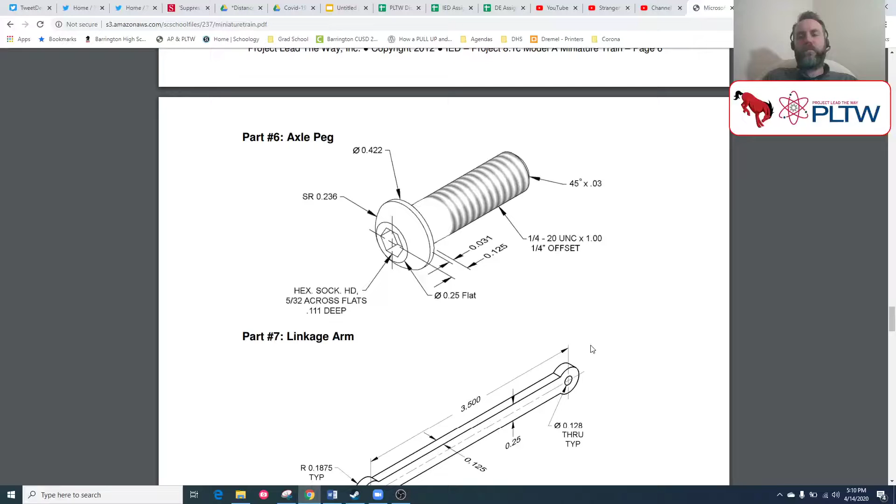All right, next part. We've gone through, we've made the wheel, we've made everything up to that. We've got 5 parts made, hopefully. Next one is axle peg.

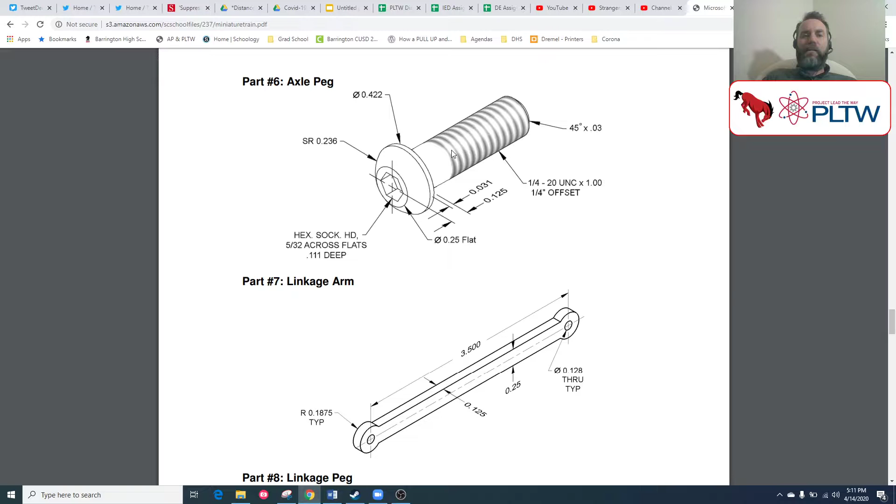I'm going to skip that one for a couple of reasons. There's some easier ways to get this. OnShape doesn't do the threads real well, so I'm going to clear it with Parmar. I've got a couple of different ways to get this one done, so I'm just going to hold off. That one's going to be the last one.

I believe you guys can draw the linkage arm. That is one extrusion, you can get that done. I believe you can get the linkage peg if you watched a little bit about the hitch peg. You should be able to get that one done.

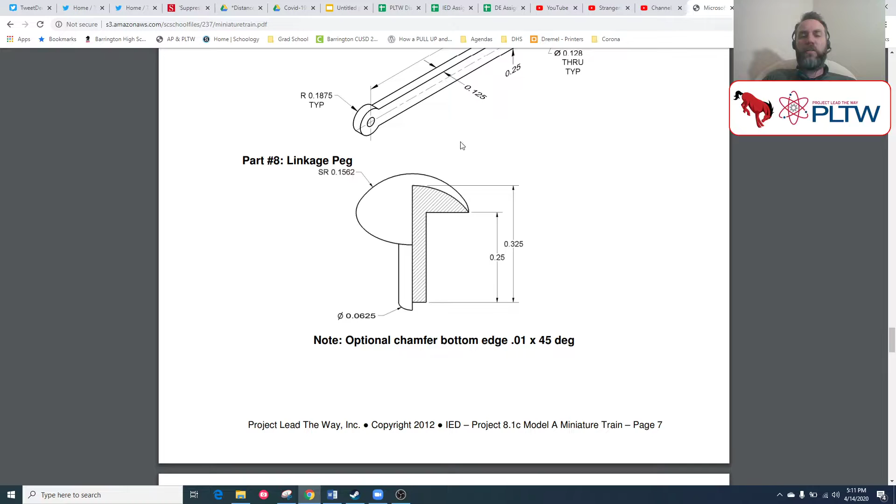Spherical radius 0.1562. Everything else is listed there. But the CowCatcher here, we got some things to decipher. So let's get to deciphering.

There's my wheel almost done. Let's add a new part studio, and I'm going to immediately rename that. We're going to rename that CY underscore CowCatcher.

And I'm going to start a sketch. Well, let's go look at the drawing here. So where to start, where to start, where to start? Well, if I look at it, I've got these angled faces, and there's no real angle called out anywhere. There's no way that I'm going to be able to make that cut, and honestly, it's a compound cut.

So what I need to do is find the bottom edge, that 5-sided, I guess not trapezoid, that kind of squished house thing - so it's an irregular pentagon on the bottom edge, and the same thing for the top edge, and then we'll do a loft between the two.

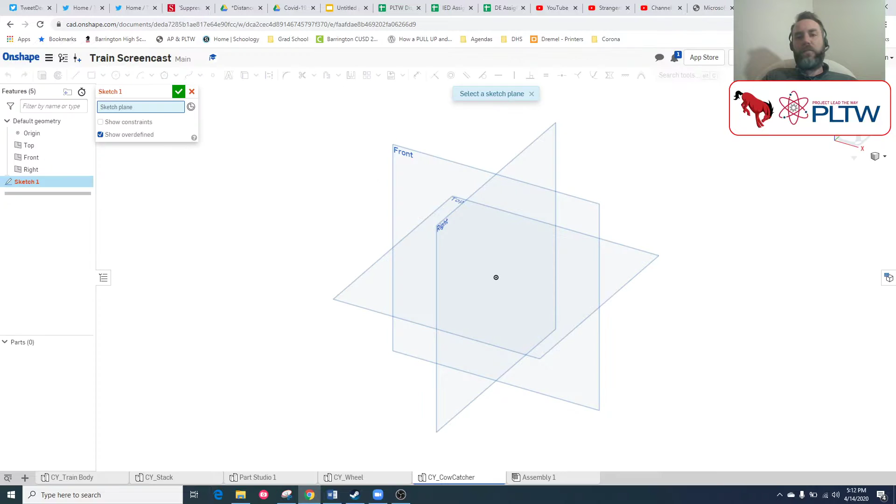So you should have done some lofts in Inventor. So let's start on this top plane. Let me move my view cube down here. Navigate to the top plane, and I'm going to draw out a line.

Usually I try to grab onto that point first, but I want to make sure that I have that other plane going right down the center line. So I'm going to do some things here, just drawing out my general shape. Here's one of the key things.

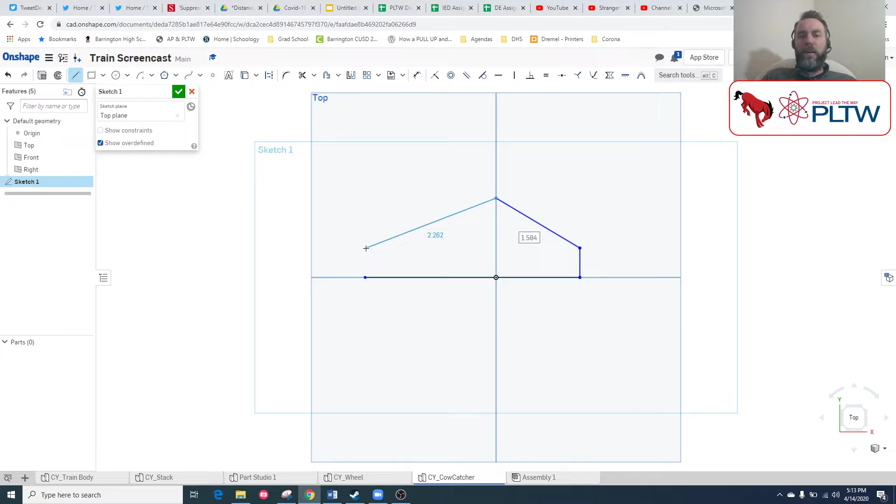I want to see that center point highlight orange when I put in the point here. I want to line that up directly. And this isn't going to end up being vertical yet, so we'll throw that in there. Make that vertical. While we're at it, let's make these two sides equal.

Listen to my son cry in the background and tell him that it's not so bad.

If we make these two equal, suddenly we've got it so that it's symmetric, and I don't even need to dimension it to be right down the center. It's just going to be there by default.

So I look at my overall width. I've got 1.8. My overall depth is 1 inch, and I think that's pretty much - I've got this 1/4 inch dimension as well on the side. So let's throw in some dimensions, and I've got 1 inch, or wait, no, 1.8.

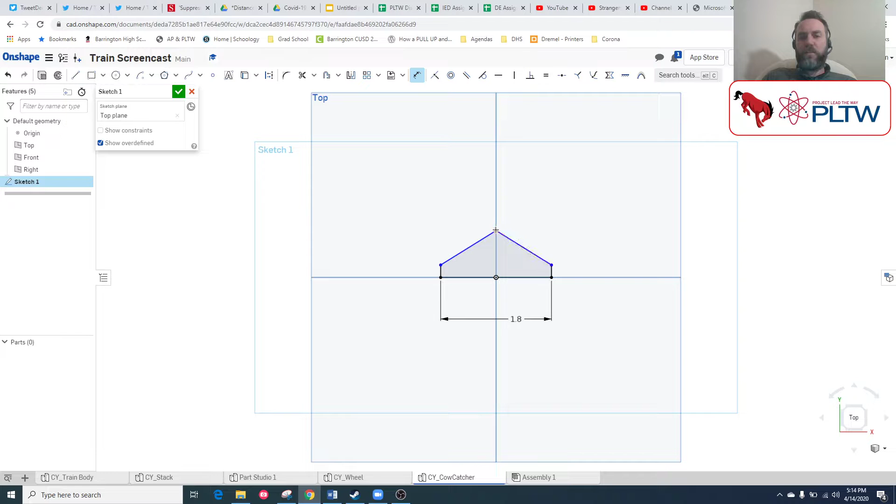Hard to concentrate in here with all the wailing.

And 1, and 0.25, and the whole thing turned black, so that's good.

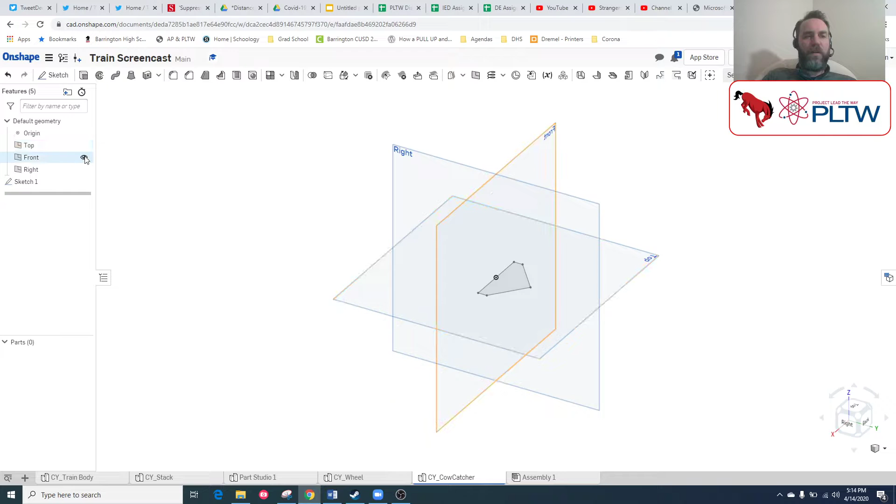We will just leave that sketch alone for right now. Now we got to go and create a new plane, and let's just turn off the other ones for a second. Let's make them go away for the moment.

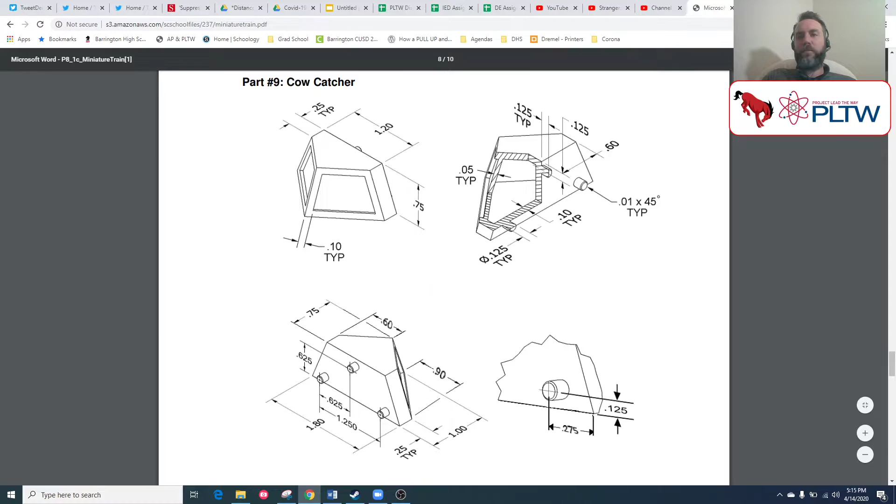And we will make another plane. Right there is our new plane, and we are going to offset that from the top plane - 0.75? 0.75 is the height. Our width is 1.2, and our distance, we'll call it depth, out to this point on the top is 0.75. So I want to make sure that I am drawing, make that plane.

So on plane 1, I am looking straight down on it. I want to reference that origin point. So let's do a sketch on plane 1.

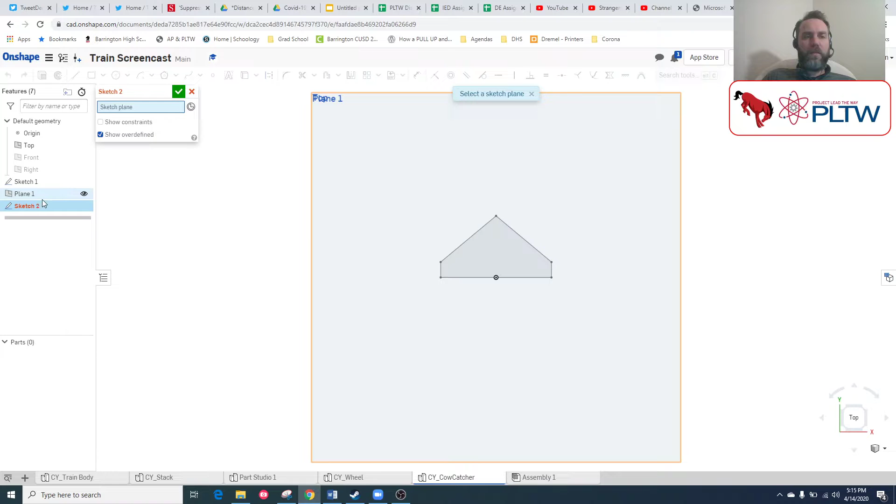We're on plane 1. Select plane 1 over there. Got it. All right, and I'm going to draw my line.

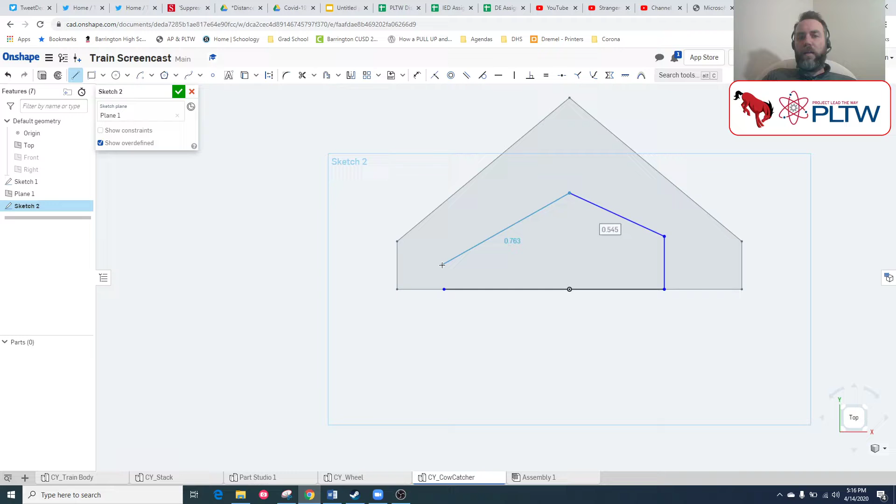Zoom in here a little bit, making sure that I'm going to be horizontal with that center point. Don't care that I'm not perfectly aligned there. Now I want to make sure that this midpoint is directly above there, and it goes in vertically. That's not vertical yet, so I'll make that vertical.

We're going to type E for equals. We'll make both sides equal. We will make these two equal, and when we do so, it centers itself.

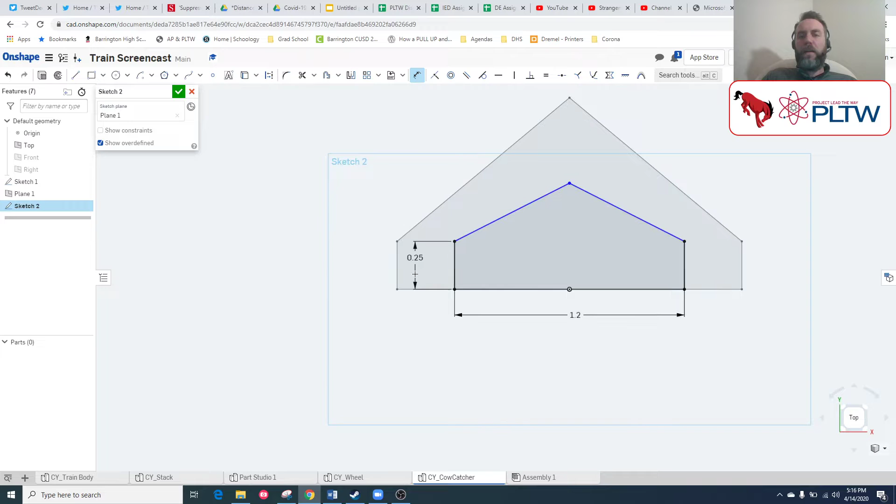Now we need to throw some dimensions on there. The key dimensions were from here to here, being 1.2. We were pretty close, each side maintaining and being 0.25. And then from the top point to this base here, I believe that was 0.75.

And there you go. So now, if I finish my sketch, I can loft between the two of them.

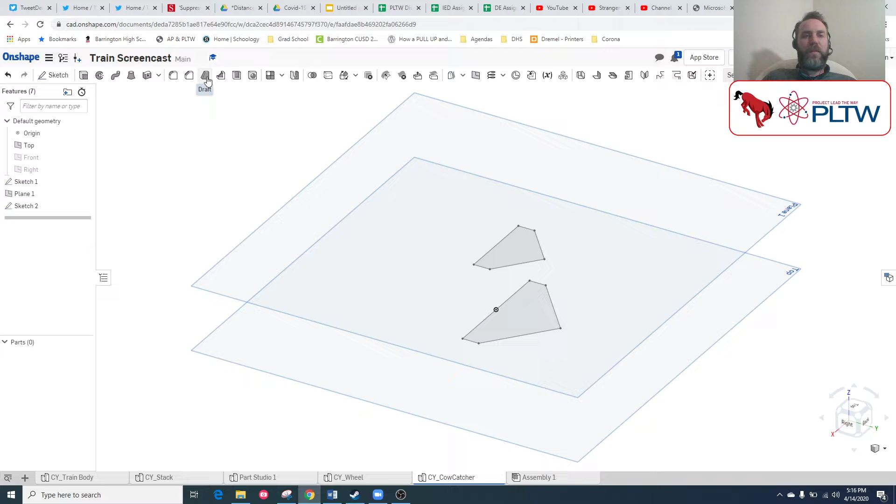That's a draft. There's loft. So it's select sketch 1, select sketch 2. We want to add - I guess we can't add. We want to make a new solid here to start.

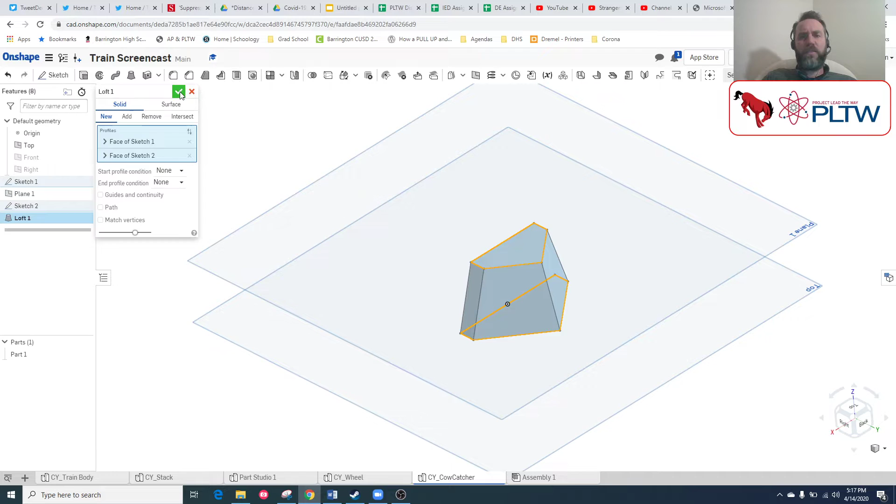And it looks like that is right. It looks a little steep. Did I make that too high on the last, or the offset too high? I think I did. Go to plane, edit my plane. Offset distance was 1 inch. I'm going to bump that down to 0.75.

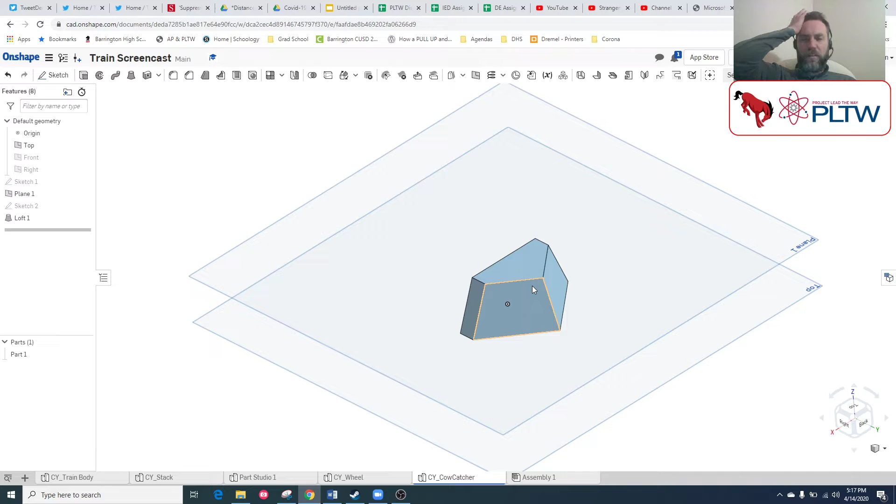Say check, and that looks more correct. So you see, just like Inventor, we're able to go back and adjust many things.

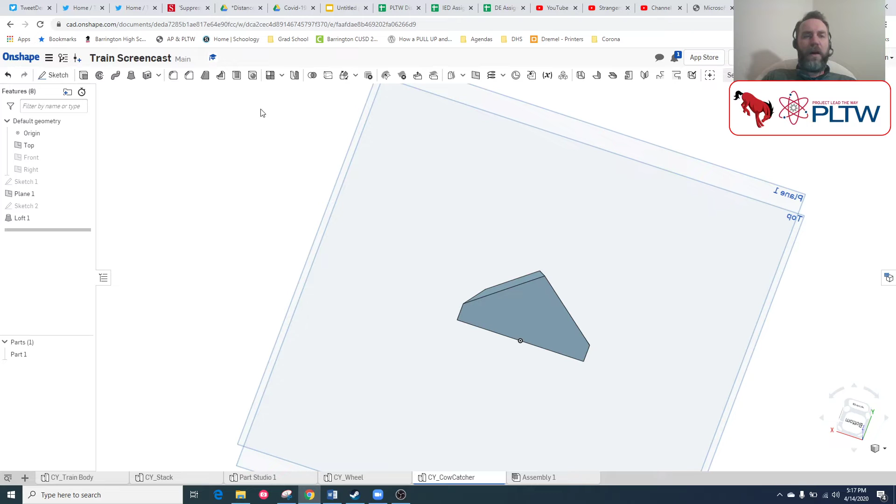Next thing we have is this shell on the bottom, and I think we've all used the shell feature in Inventor. Here we're calling out that the shell thickness, that wall thickness, is 0.10. So if I navigate to the bottom and say shell, there's my shell command. Select that bottom face, tell it to be 0.1 inches, and there you go, you've got that feature built right in already.

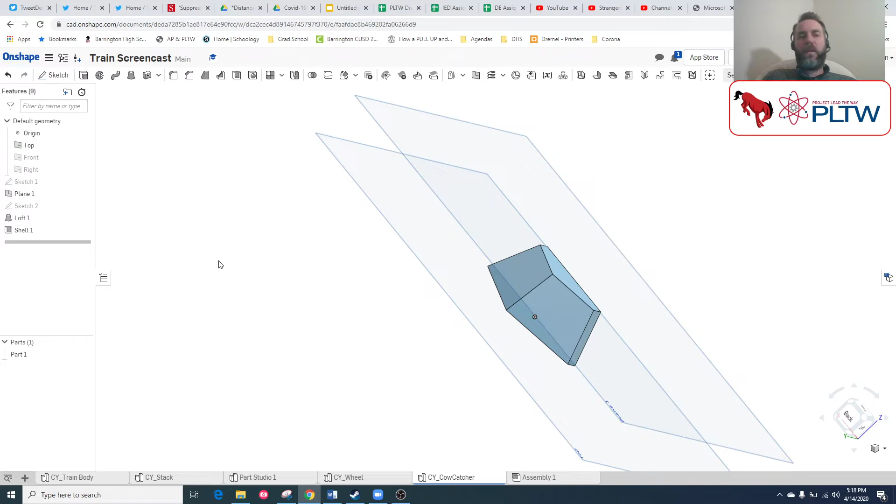Next step, I'm going to turn off that plane, turn off the top. I've got no planes on this thing now, and I'm going to put one that goes right back down the middle, just for giggles right now, because I'm going to use it.

I needed to focus on these little window insets, which say they are 0.1 off the edge, and it's typical - so 0.1 off of each edge.

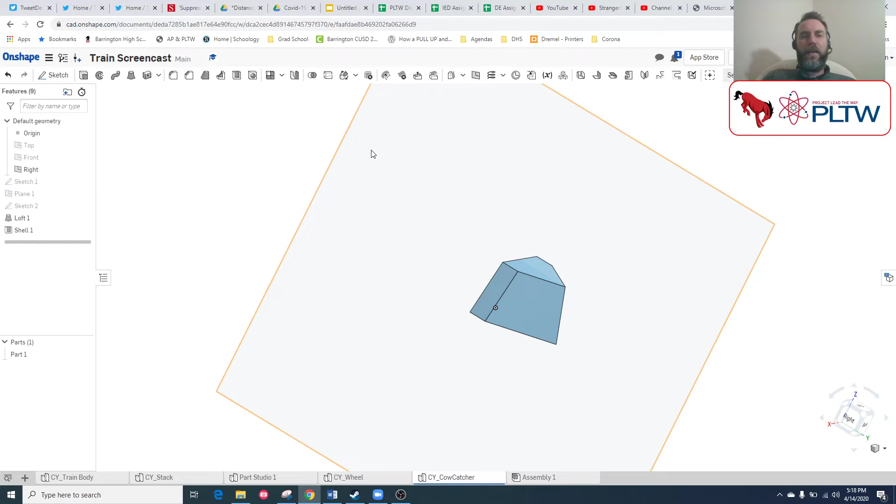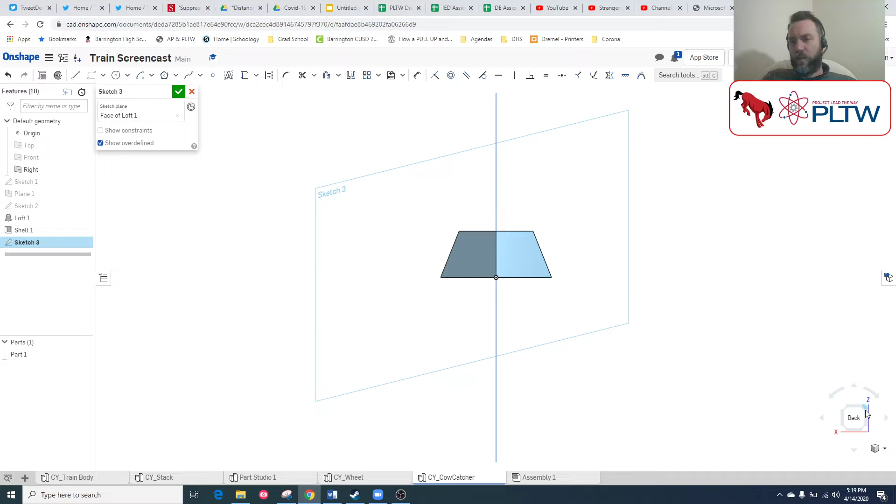So if I were to sketch and select this face right here, you see that I now have this plane that is akimbo. If I'm looking at it from the front, you see this weird sketch plane. If I look at it there, I've got this weird sketch plane.

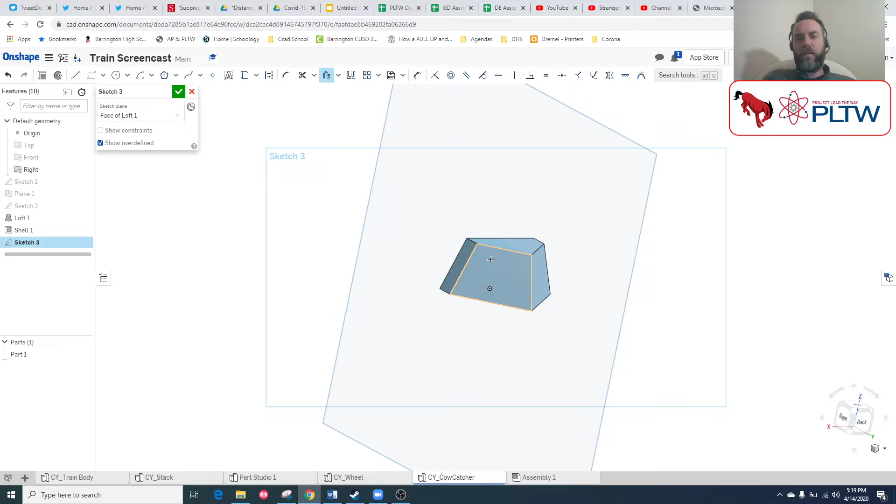So I'm going to right click on that sketch and view normal to sketch plane, so I'm staring straight at it, and I want to just offset the edges. I think I can do that by selecting offset - I don't even need to, just select the whole face, and you see it's offsetting in the wrong direction. I think I can click that arrow, offsets it in the other direction, hit enter, it placed it, and I want 0.1, and it now dimensioned that whole thing.

There you go. I need to extrude that section back and cut away. We see the wall thickness is only 0.05 here - it's not all the way through, it's just going back a little bit less or more, depending on your view.

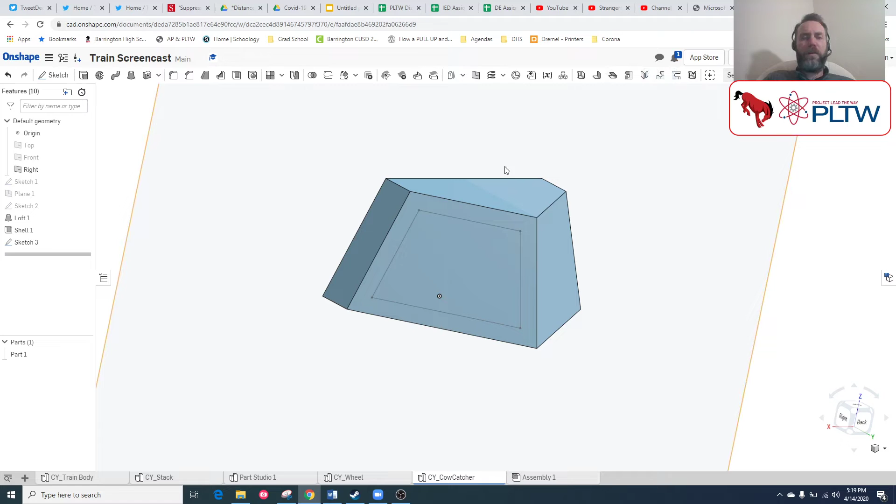So I'm going to hit Shift E for extrude. I'm going to select that face, take a look at it. I want to do 0.05, want to make sure it's going the other direction, and make sure it's removing that. And there you go, so it's performing a cut.

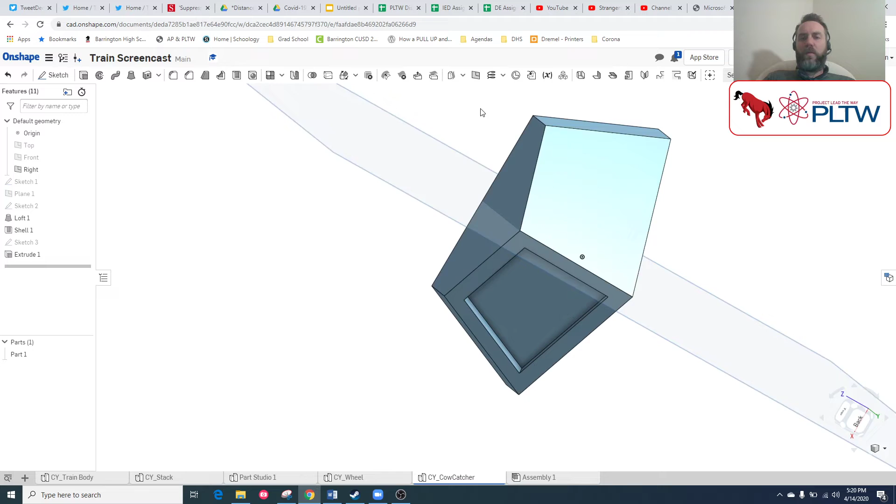Now you can see why I put the plane in there, because I only did that once. I don't want to have to go through that all again. I can easily select mirror - I want to do a feature mirror. The feature I want to mirror is the extrude. The mirror plane I want to select is the one plane that I have on there right now.

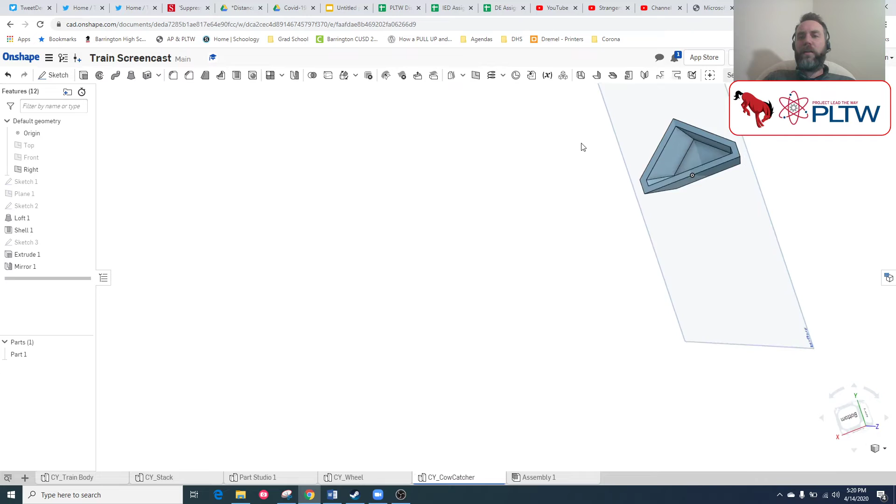And you see it's placed it over there on the other side. It should not have cut out anymore. If you did these cutouts first, your shell would be really weird - it would have this bump on the inside, so order matters.

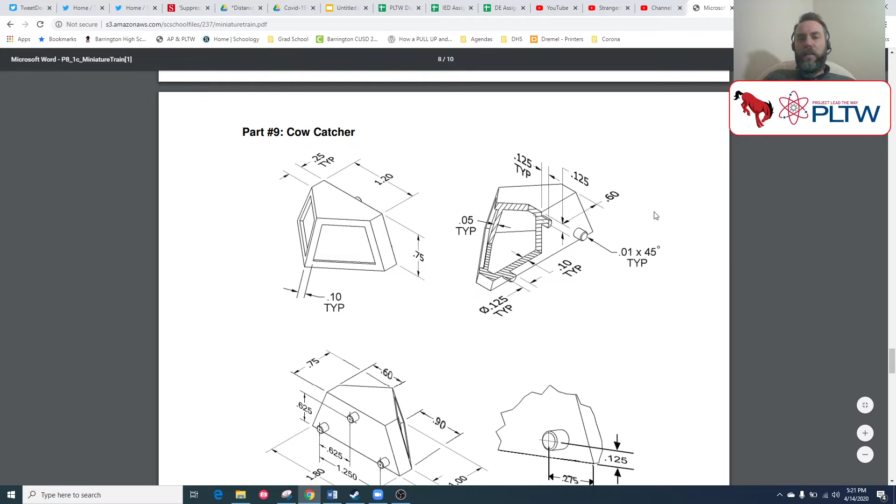But that's almost the whole part. The last thing we need to do is put these pegs on the back. They've got a little chamfer on them, an 1/8 of an inch in diameter, 1/8 of an inch extruded. This top one is 1/8 of an inch down from the top edge.

I believe they're 1/8 of an inch up from the bottom edge. Let's look here. Yeah, right here we've got 1/8 of an inch. The middle one is centered, and it's 0.275 over from the edge. I think I can remember all of that.

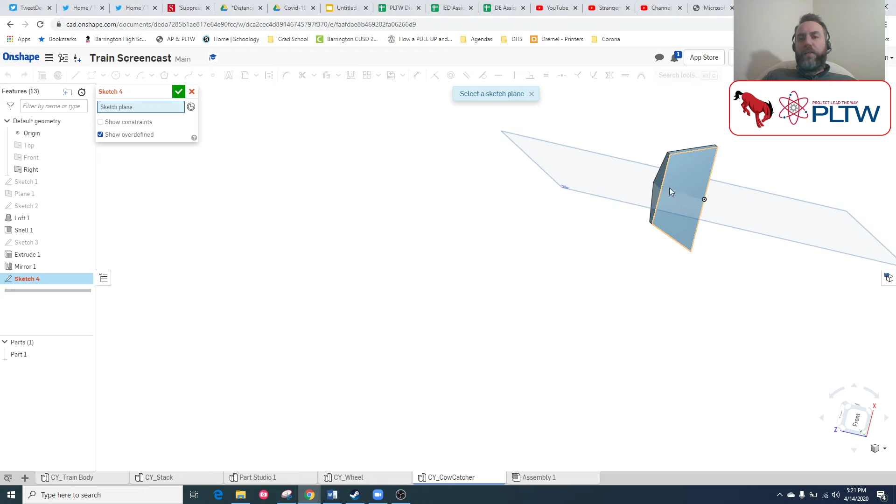So let's draw a sketch on the back plane. Let's take a look at it. And things don't quite look, I guess they are. And let's just draw 3 circles.

I'm going to make sure this first circle comes in and is snapping to that origin. I'm going to draw my other 2 circles over here. We're going to say equals and just click all of them so they are all the same size. While I'm doing some geometric constraints, let's make these 2 horizontal with each other.

And let's do that trick I did from the previous one, and let's draw in a center line just right down the whole thing, and that way I can use the symmetric command to set those so that I really only have to dimension them one time.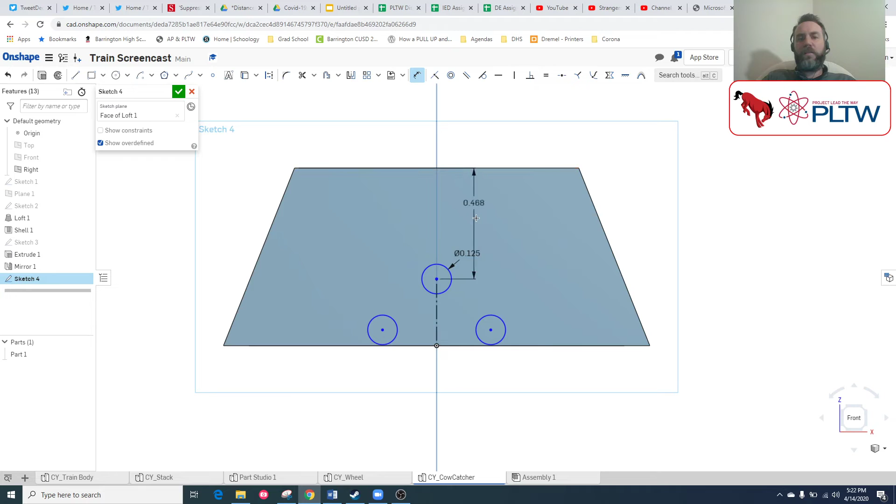So dimensions: we have 1/8 of an inch on the diameter, 0.125. We have 1/8 of an inch from the top edge for this one in the center, so 0.125. I have 1/8 of an inch off the bottom edge for both of these, 0.125. And from that corner, I had 0.275.

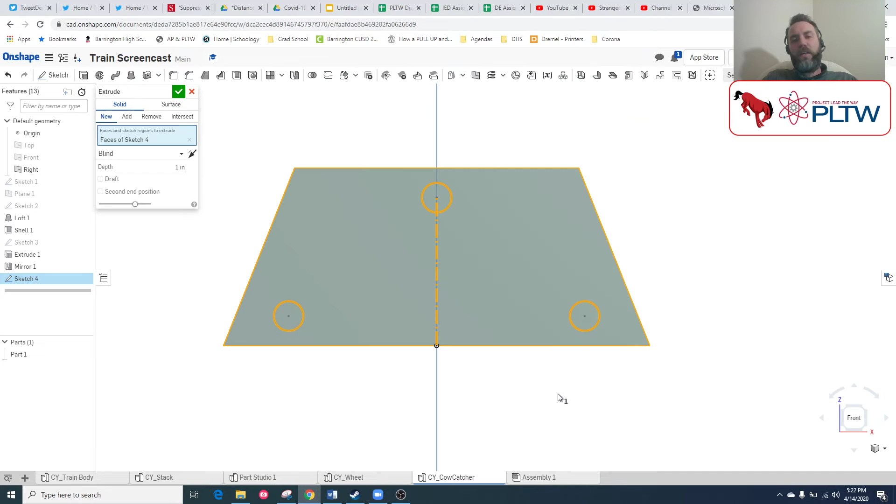There you go. I can hit Shift E. I'm going to extrude those all to be 0.125 in depth. That looks right. I need to look up the dimension on my 0.01 on my chamfer.

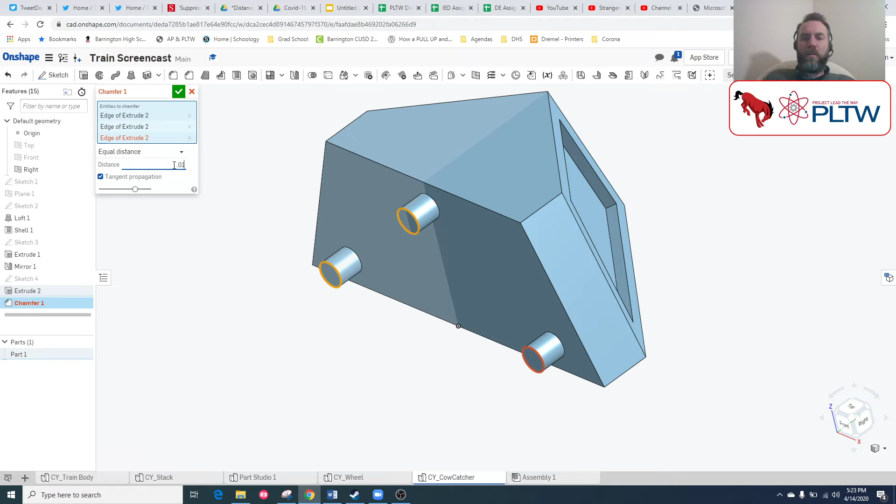Where's chamfer? That one. Select that edge, select that edge, select that edge. Make sure that it is 0.01. Hit enter, and there's my chamfer on all of those. And there's your completed part.

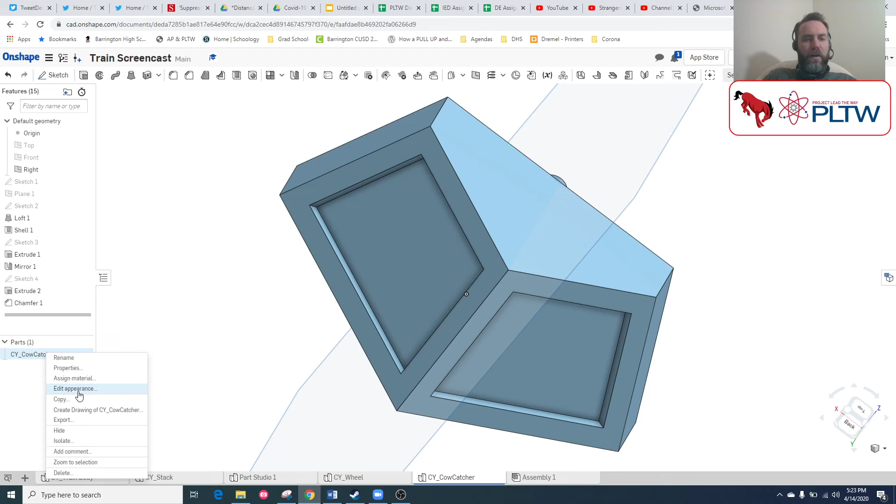We've got it named here, CowCatcher. Let's name the part CY_CowCatcher. Let's change up the color to be something fun - green. And let's make it out of ABS plastic one more time, so ABS.

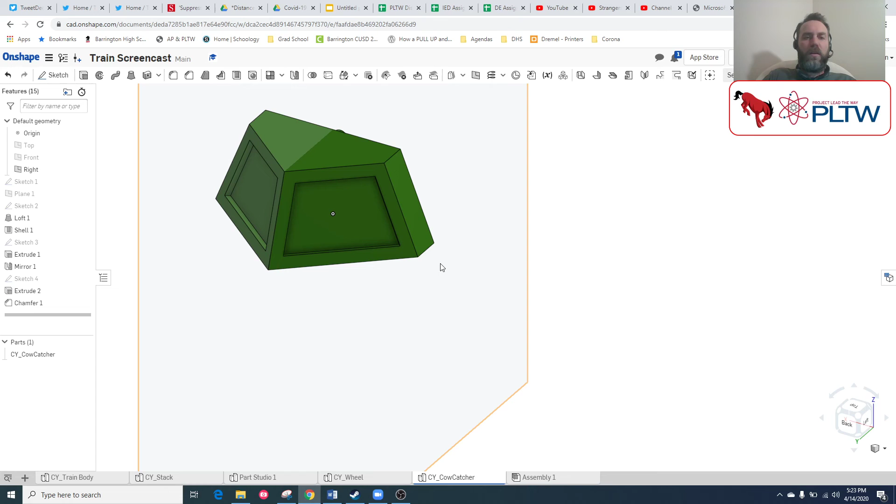Let's zoom in here. We will highlight the part, and we will come over here to the scales of justice - that thing down here. You can see, if I hover over that, display mass properties, but it looks like a balanced scale.

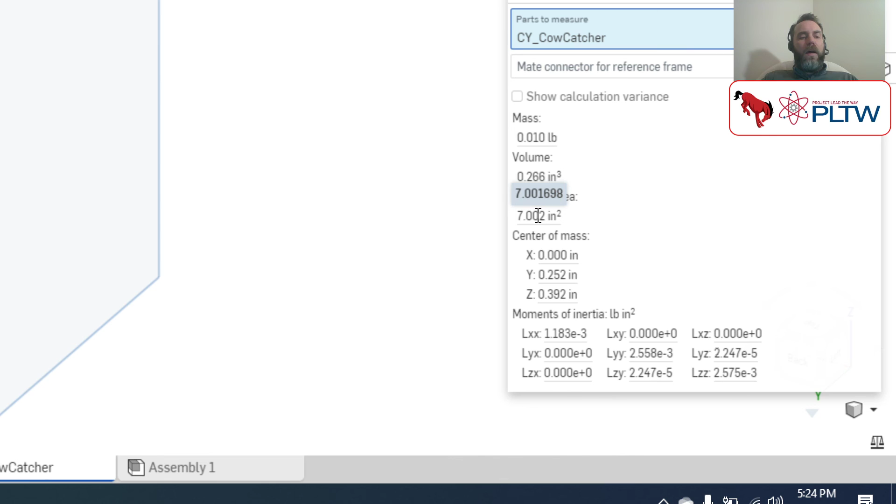And here are your properties that you should have: 7.002 inches in surface area, 0.266 of volume, very light part. If you hover over them, you get the full scale there, 7.001698. I think that is all I'm going to do, all the parts I'm going to make for you.

Maybe I'll go back and make that axle peg, but I've got another solution for that one. And then I'll show you how to put this thing all together.